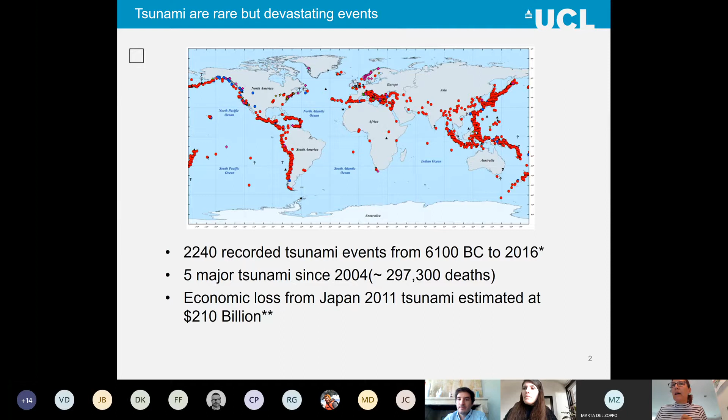The work presented today is part of research I've been conducting for the last 13 years with a number of partners. I thought I would list these here to show that this is not just one or two people's work, but the work that Marta and Marco are presenting, all led up to by significant collaboration with many partners across UCL, as well as outside of UCL, such as HR Wallingford.

Let's start our journey through tsunami engineering with the first question: what does a tsunami look like? For those who don't know, a tsunami is essentially a large wave with particular characteristics. When offshore in deep ocean, it typically has quite a small amplitude, but when it comes near shore, the amplitude grows and can devastate, causing a lot of damage.

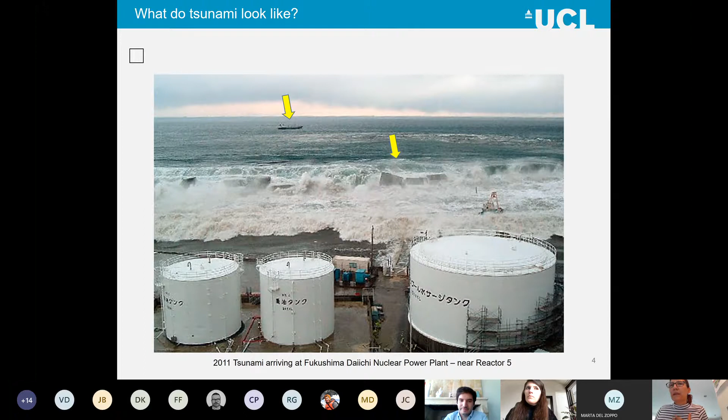This is a picture from the Fukushima Daiichi nuclear plant in Japan being hit by the 2011 tsunami, showing the seawall being damaged. But a particular feature of tsunami compared to other waves is their wavelength - they are extremely long, and this is important from the point of view of inundation properties as well as their forces on structures. So we're focusing on the structural engineering part of tsunami today.

But the characteristics of the tsunami have an important influence on the loading that the structure feels. This is showing you a picture of the Boxing Day tsunami as measured by an echo sounder offshore of Thailand, and it shows that the wave period is about 23 minutes offshore. This long wavelength results in a very long duration inundation onshore.

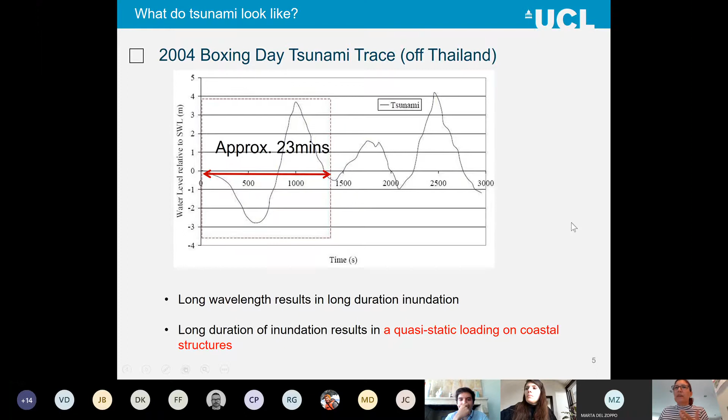So we're talking flows that last a matter of minutes, not seconds. This long duration inundation results in what we now know is a quasi-static loading on coastal structures. It's worth remembering that because many of you are earthquake engineers and we're not used to thinking about static loads so much as dynamic loads.

I think quite a revelation to myself was actually that in the case of tsunami, buildings' dynamic properties are actually not excited. Within this image, what I'm trying to show you is a set of curves for a single degree of freedom system, or a series of single degree of freedom systems with different ductility levels shown in different colors. It's basically looking at what overstrength these elastoplastic single degree of freedom systems can achieve when affected by loading that lasts T duration compared to their period.

Looking at the curves can be quite difficult to interpret, so I'm going to give you an example of what this means in practical terms. If we think of a 10-story building which has maybe a natural period of around 1 second, and let's say it has a ductility of 4, if you look on the curve, essentially its overstrength will be about 0 for any load that exceeds a duration of 3.5 seconds. It's not exactly just the load duration, but a load greater than its yield strength.

So as a tsunami load can exceed 20 minutes, the ductility plays a very little role. In earthquake engineering, we use ductility to resist, for very short period loading, higher loads than the yield strength of the structure, or higher loads than actually the maximum capacity of the structure. We take that through deformation, and that deformation is then recoverable typically after an event.

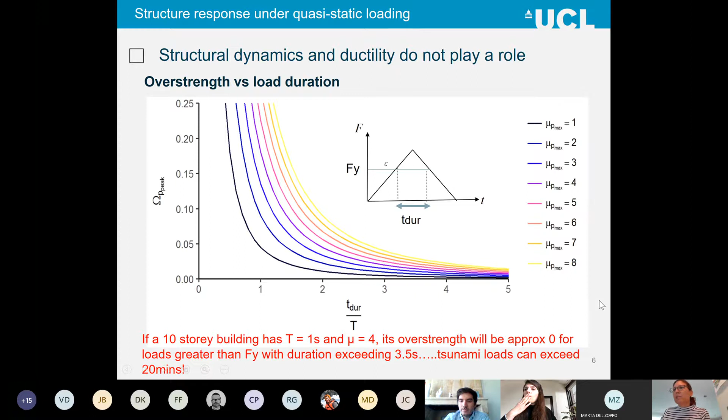In the case of a tsunami, no — your structure yields, and then the loading keeps pushing it, so it keeps deforming the structure until the structure collapses. This is a major difference between the two types of loading, and I think it's a difference that has been largely overlooked because tsunami engineering has been led by earthquake engineers.

So what are the other differences between earthquake loading and tsunami loading? Well, quite simply, the distribution of loads. If we think about a nonlinear static approach often used in earthquake engineering, you apply the loads in an inverted triangle, as shown here. In the case of tsunami, the loads come from below — the water inundates the ground story, first story, second story in sequence, and the loading is applied from below in a triangular approach.

Now, if we push over the structures using these two different loading distributions, we actually see very different strength capacity of the structures. Under earthquake loading, the seismic strength is actually much smaller than the tsunami strength, and this is quite interesting — there is no direct relationship between the earthquake capacity of a structure and the tsunami capacity of a structure.

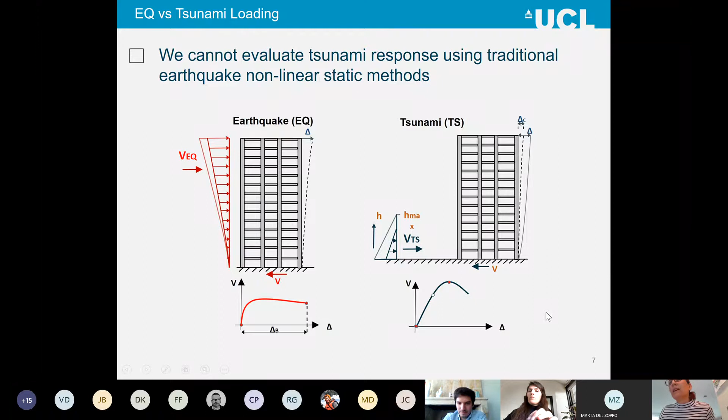This is something that Marco will come to again within his presentation. So the two main differences between earthquake responsive structures and tsunami responsive structures are given by the nature of the loading — the fact that it comes from below, and the fact that it's long duration, and therefore that ductility essentially plays no role. So a tsunami response is dominated purely by the strength of the building, with no contribution of ductility.

Tsunami loading also, because it comes from below, applies massive shear forces, lateral shear forces on the elements, particularly at the ground story — again, something you will see in both Marco and Marta's presentations. But because it's long duration loading, nonlinear static methods can actually represent the tsunami response of a structure well, much better than they can in an earthquake situation, because earthquake loading is actually very strongly dynamic, whereas in an earthquake we simulate, we assume it's static when applying pushover methods, but actually it's not.

In the case of tsunami, nonlinear static methods can represent tsunami response properly, but we cannot use the same methods that we use in earthquake engineering. So new tools need to be developed, and some of these are going to be explained by Marco.

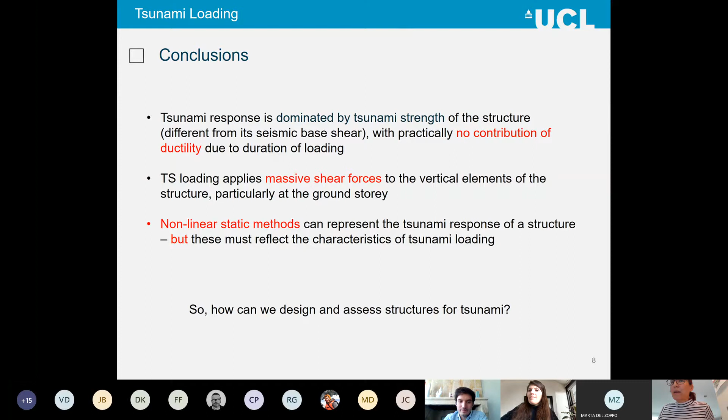So in the next two presentations, what you're going to see is essentially a summary of some of the advances in both design and assessment of structures for tsunami, carried out by our research group and collaboration. I hope you will enjoy. I will pass over to Marco first, and thank you all for listening to my short introduction.

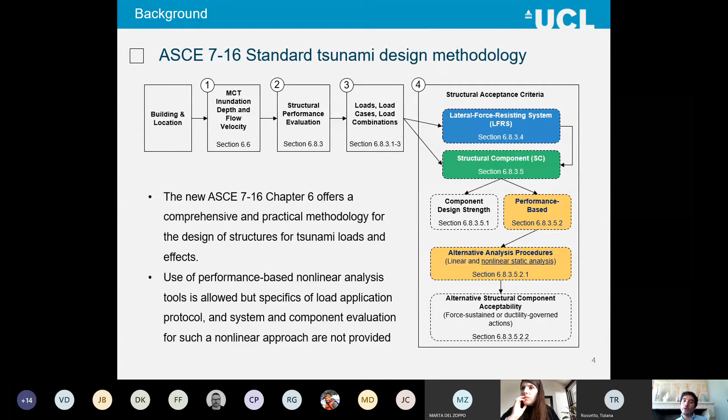So the question for most of you might be, how do we perform a tsunami pushover analysis? As Tiziana mentioned earlier, we can start from the seismic pushover analysis, which has been a typical approach in past research studies. Essentially it's called constant depth pushover: you apply fixed loads at fixed locations along the height of the structure and push that structure up to failure, assuming a constant depth.

But as you may expect, this is not very realistic, because a tsunami is an inundation - there is an increase and decrease of the tsunami depth and flow velocity over the duration of the event. That led to the development a few years ago at UCL of the variable depth pushover, which was found to capture better the effects of the tsunami on the structure.

In these analyses, both the tsunami depth and the flow velocity are increased following a load control approach. That is, however, a limitation, because it cannot capture the degrading branch of the pushover curve.

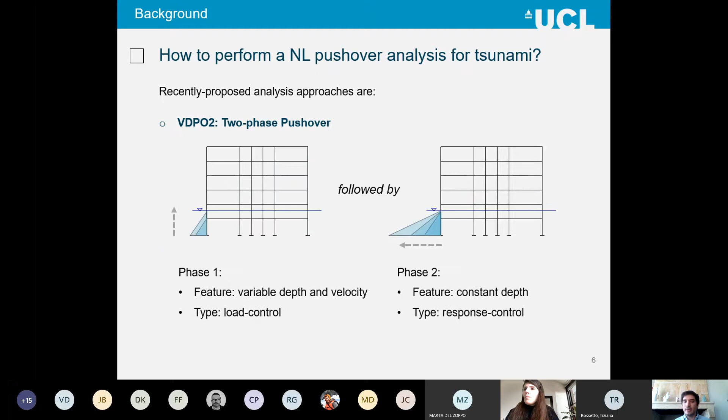So more recently, we came up with an approach that is the VDPO2. It's essentially a two-phase pushover that combines the advantages of both methods. In the first phase, we apply an increasing load in depth and flow velocity up to the point where we want to stop the analysis, because we have reached a prescribed load or because there is a numerical convergence issue. At that point, the analysis switches to a second phase.

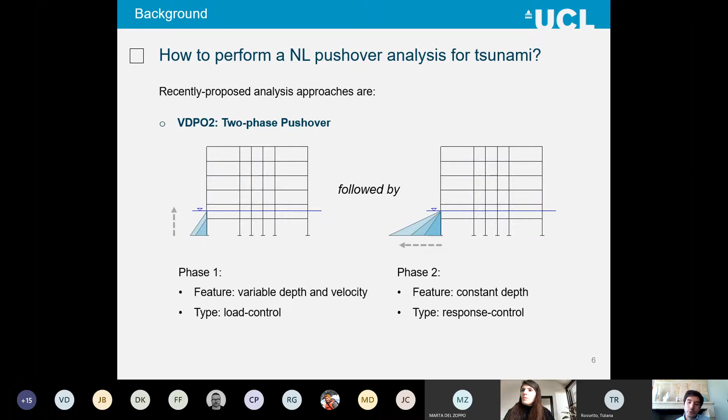Now the presentation today will show you how we try to adapt this methodology within the design framework of the ASCE 7-16 to provide a tool that users and practitioners may follow when they have to design a structure to tsunami loading.

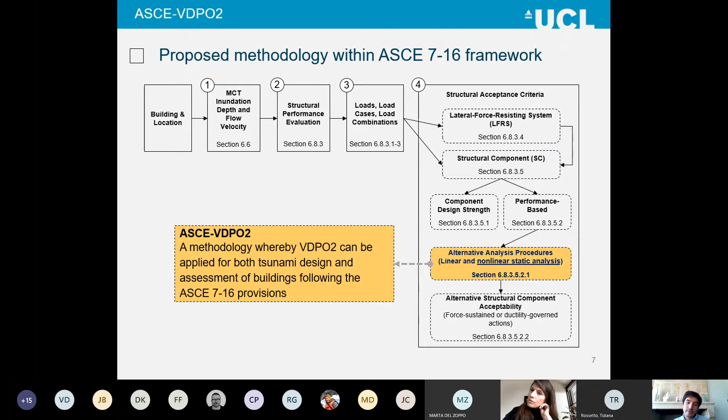To demonstrate this approach, I will be using a case study building: a 6-story reinforced concrete building located in a highly exposed area to tsunami in Seaside, Oregon. This area is also adjacent to the Cascadia subduction zone, so seismic and tsunami hazards are both very high.

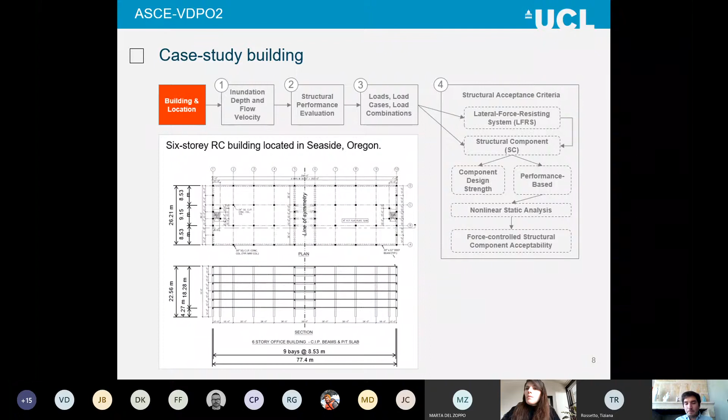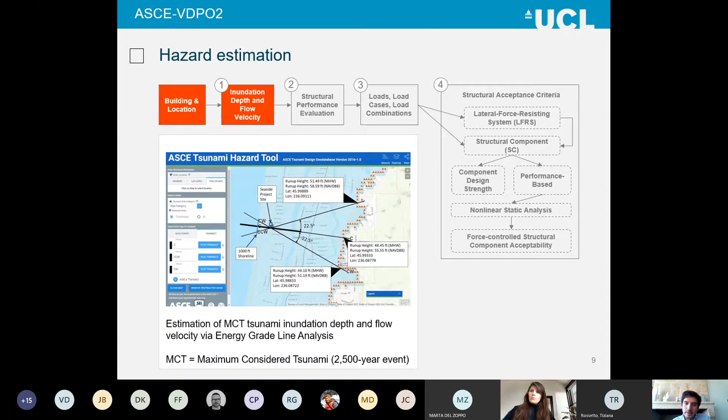The code also provides a time history curve for the tsunami. This means how the flow depth and flow velocity are assumed to vary during the event, and that identifies some load cases that are part of the design process.

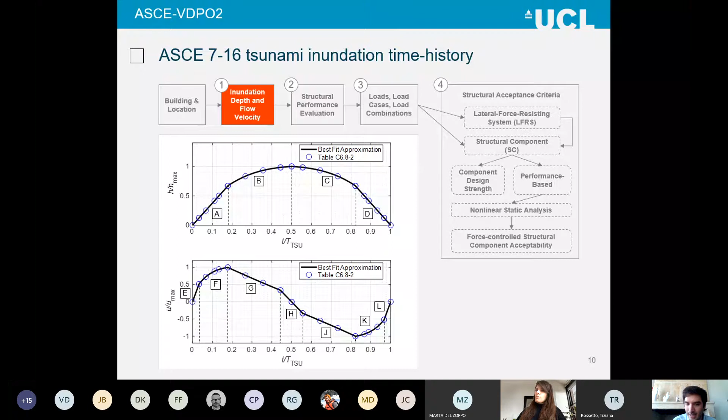What's important to remember is that these are the two main parameters that characterize the hazard at the building site. One can estimate relatively easily the total force applied to the structure, the overall force that will be resisted by the lateral force resisting system.

It's interesting to note that the maximum force occurs when the flow velocity reaches its peak, and the flow depth is two-thirds of the maximum value. This stage is identified in the code as load case 2. So this is the background in terms of design.

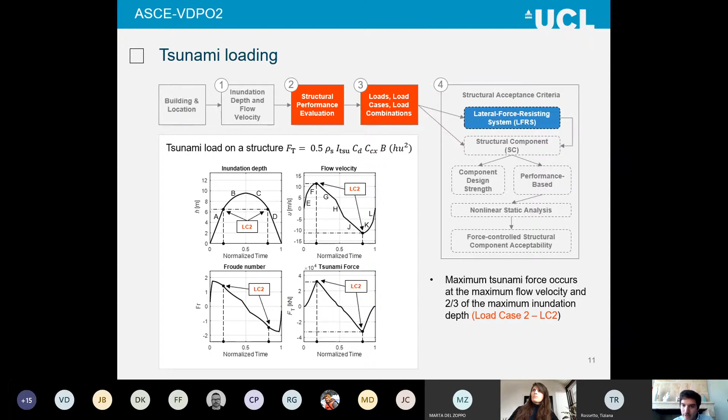So how do we apply all this into our pushover analysis? It's clear that load case 2 is controlling the design of the structural system. So what we have come up with is to apply directly the time history.

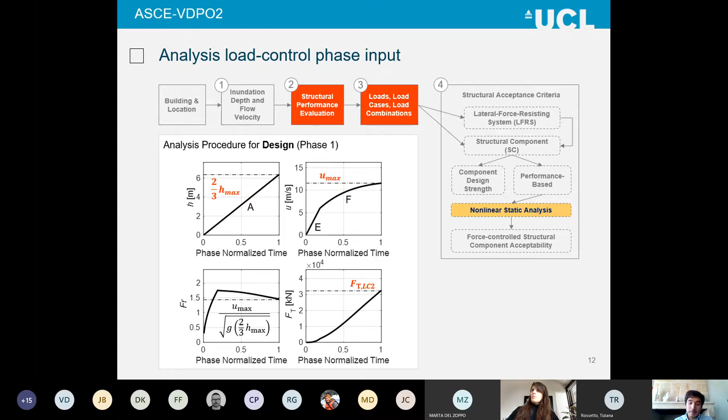We apply the pseudo time history analysis curves provided by the code into the analysis tool, so that we can evaluate the behavior of the structure up to this maximum force. At that point, the analysis can switch to a constant depth pushover to bring the structure to failure. But once we know this force, the question is how do we apply this force to the structure?

The ASCE 7-16 considers the tsunami force as uniformly distributed along the structure, but does not prescribe how this force should be applied along the columns when discretized.

A typical approach in past studies has been similar to what you do in a seismic pushover, applying nodal loads at the story level — these could be named story loading discretization. An alternative approach tested more recently is to apply loads along the columns instead of just at the story level.

So a distribution of point loads along the columns that was found to provide a better estimation of the impact of the tsunami loads on the structure.

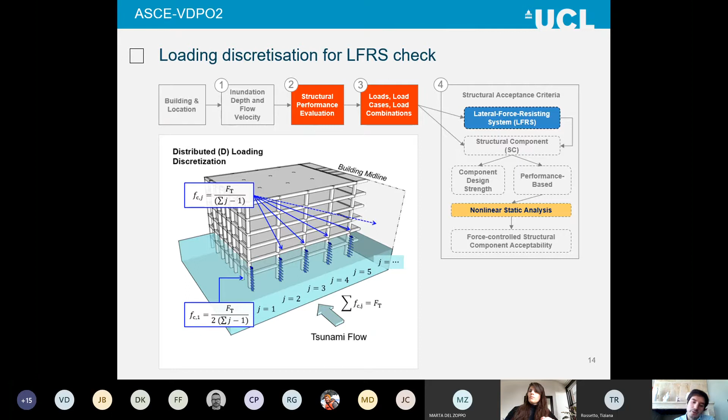An important aspect to understand is that a portion of the loads by which we discretize the overall tsunami force goes directly to the foundation. So what we're actually looking at here is the net tsunami force that is going to be resisted by the lateral force resisting system.

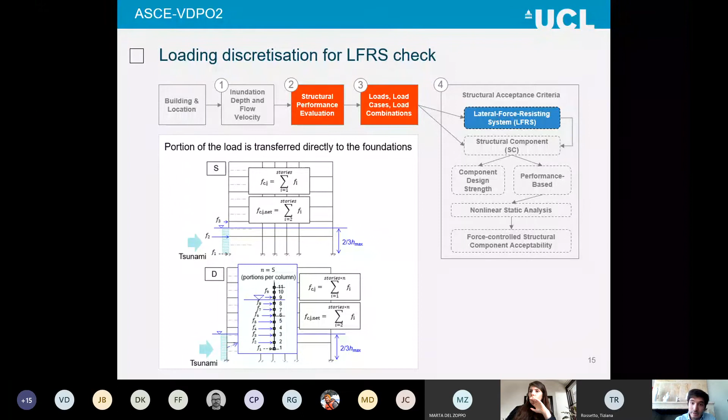At the start of my presentation, I mentioned there are two main checks according to the codes. One is the systemic check on the structural system, but the second one is on the structural components. Individual structural components are subjected to an enhanced tsunami force due to local effects around the elements.

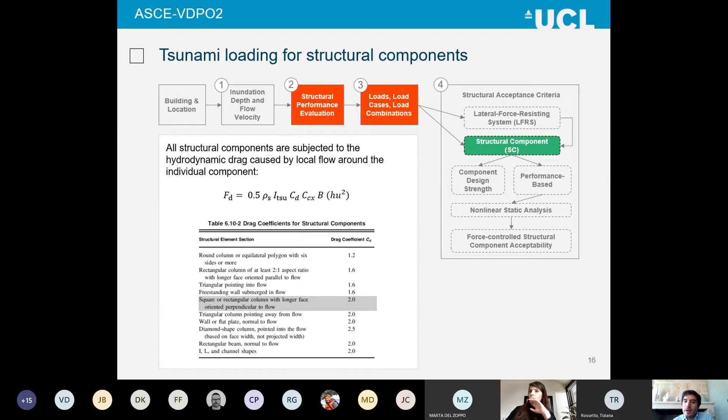Also, if these structural elements are part of the lateral force resisting system, they should be tested against the combined effect of the systemic and structural component loads. That means we need to come up with a discretization that accounts for this second check.

So what we have proposed is to apply a distribution of point loads to the individual line of columns where we want to perform the structural component test check, and to the remaining columns we apply the remainder of the systemic tsunami force.

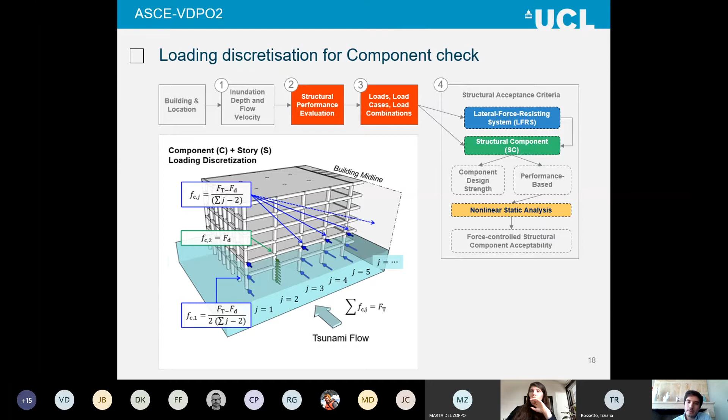These remaining columns can be subjected to either point loads or distributed loads, as in this sketch, or point loads. We have tested all these assumptions and loading discretizations in a finite element model in OpenSees.

So I developed a 2D model of the structure. Due to time restraints, I'm not going to go into the details of this modeling, but I want to highlight two things. First of all...

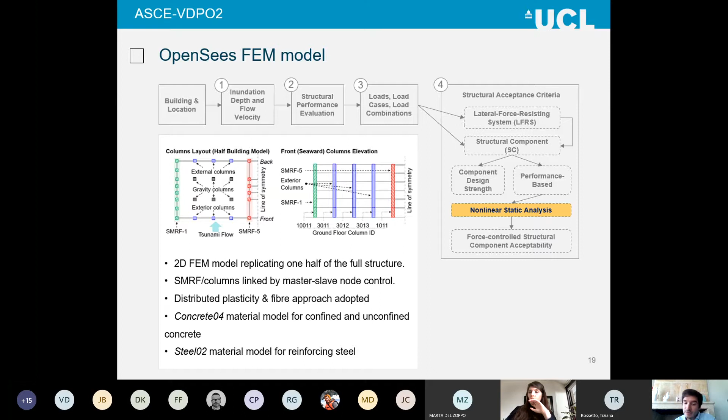A distributed plasticity approach for modeling the structural elements is essential because we are applying a distribution of point loads along the elements. This is something you may not always assume in a seismic pushover analysis.

But also there are shear reinforcement variations along the ground floor and upper story columns, and that can also play a role in the response of the structure to this tsunami loading.

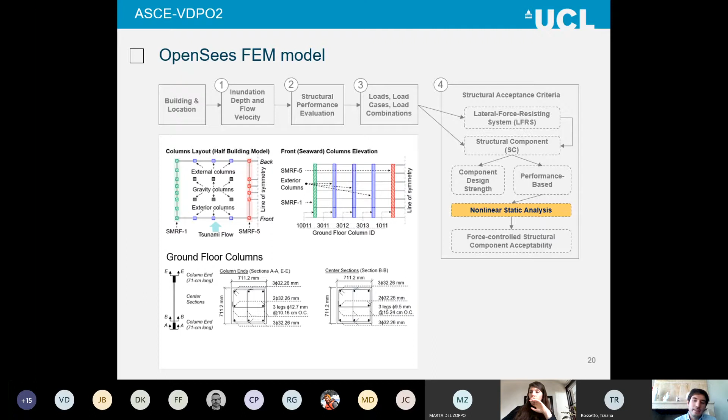Let's now look at the results, and compare what you get by using the prescriptive systemic check — what the ASCE 7 tells you to do — using a simplified approach that essentially compares the applied tsunami force as calculated before with the design strength of the structure, the seismic design strength of the structure, enhanced to account for the typical overstrength.

For this specific case of the building, the applied tsunami force is smaller than the expected seismic strength. What's interesting to note is that this expected seismic strength, as defined by the code, is essentially based on the overstrength factor for the typology of frame — here a reinforced concrete frame — and the design base shear, depending on its location and the gravity weight.

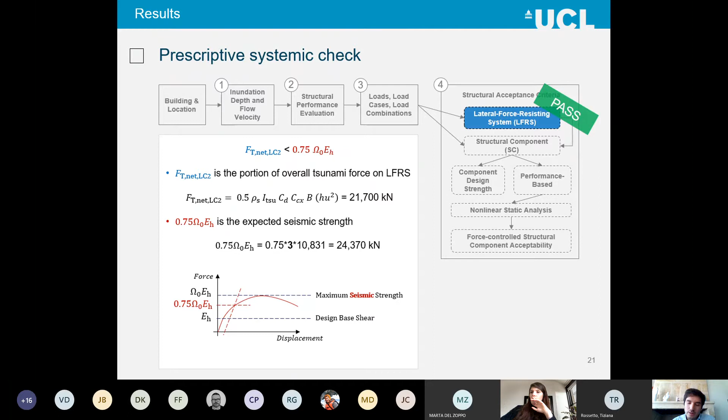But to draw a fair comparison, we also performed a seismic pushover analysis on the building, and we found that the actual strength of the structure is smaller than what was expected by the code. Generally speaking, this would identify an issue with this simplified check, because in this specific case, the simplified check using the actual strength would fail the test.

But more interestingly, as Tiziana mentioned at the start of her introduction, the behavior and response of the structure under tsunami loading is significantly different from the seismic one, because we can see an increased stiffness and increased lateral strength. This is what we've observed in past studies as well, because it reflects the different nature of how seismic and tsunami loads impact the building.

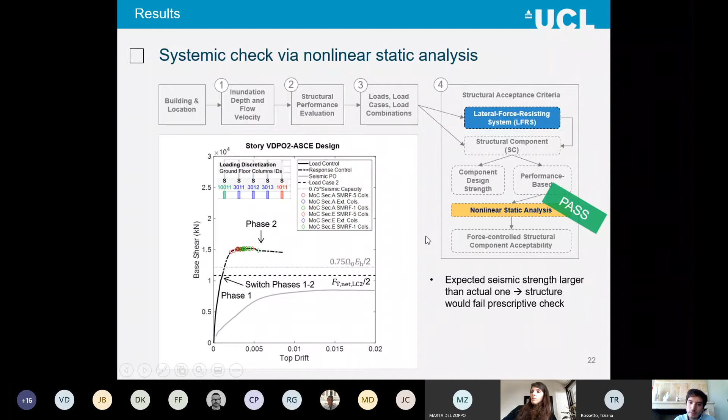When we use the other assumption for the discretization of the overall systemic force, we see a different strength, because the share of forces going into the foundation is much smaller under this assumption.

But since the forces are applied mainly at the ground story columns, these induce large shear forces, and therefore shear failure occurs, shown here as filled markers along the curve. This occurs earlier than the flexural yielding in the columns.

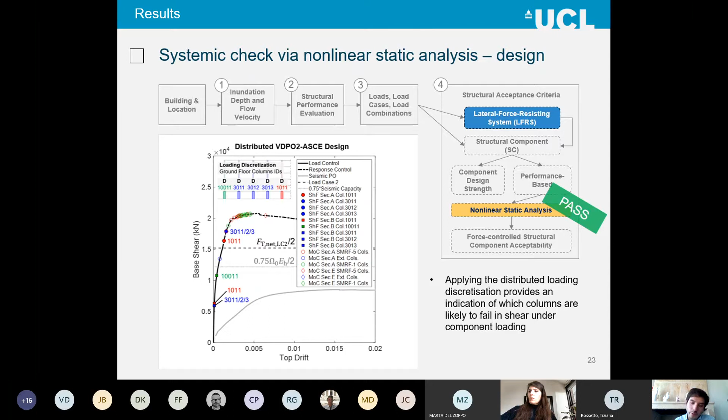This distributed loading discretization can give us an understanding of what's happening when we apply considerably large forces at the columns, but it does not reflect the component loading, because the component loading, as I showed earlier, is an enhanced force on a single individual column.

So that is what we did in the next check. For the structural component, we applied this enhanced loading on a single column and saw what happens. Essentially, the output of this check is that the structure needs to be strengthened, or the ground floor columns need to be strengthened, to meet the collapse prevention performance level.

But you can see the advantage that by using the tsunami pushover analysis, you could identify relatively effectively which elements need to be strengthened. We found similar results using either distributed or story loads for the remaining elements.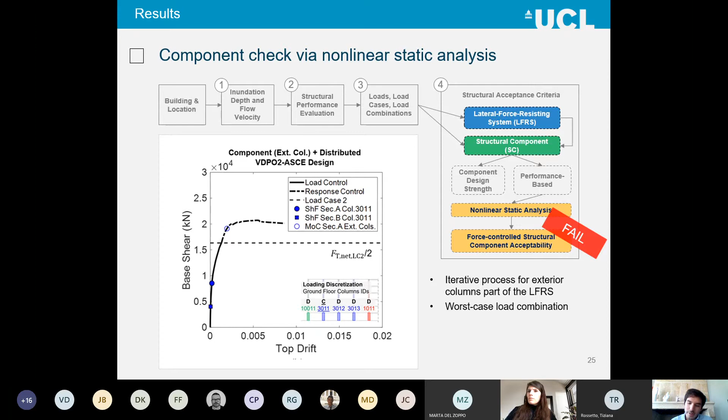To conclude, we can say that this procedure offers a tool to practitioners to apply tsunami pushover analysis in the context of the ASCE 7 standard. There's currently no guidance, so this has been welcomed by the subcommittee, and we're trying to implement this into the commercial software Seismostruct to provide a tool that can be used more easily than in OpenSees.

But there are two main remarks I'd like to make before concluding. It's clear from these results that it's strongly recommended to perform nonlinear structural tsunami analysis instead of the simplified prescriptive check, due to the complexity of relating the seismic and tsunami lateral strength of a structure.

And when we look at the component loading, it's clear that a tsunami pushover analysis can help identify better which critical elements need to be strengthened. This could provide a more economical design instead of redesigning the entire structure to meet the design force specified by codes.

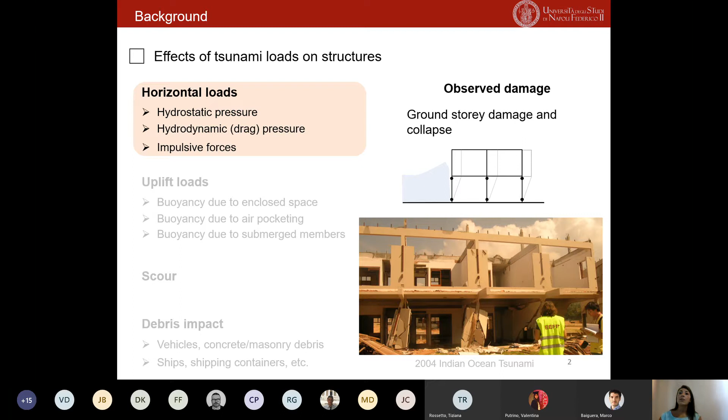As we know, tsunamis are very complex phenomena, so they induce different kinds of pressures and effects on existing structures. We have horizontal loading in the form of hydrodynamic or hydrostatic pressure that impact the exterior surface of the buildings, a function of the exterior envelope of the structure, and can have high magnitude at the bottom of the building. So measured damage is concentrated at the ground story level in the form of flexural damage mechanisms, such as soft story at the ground level, or shear failure of the ground story columns.

But we have other kinds of loads: the vertical induced uplift loads induced by the tsunami on structures, which usually are not included in common analysis when we assess the behavior of the structure, but they play an important role in the overall performance.

If we think of a building with a very small opening ratio, or partitions and exterior enclosures able to sustain the tsunami flooding, in such a case we will have high buoyancy on the building caused by the enclosed air inside the submerged building. This enclosed space will develop uplift forces applied to the foundation of the building. These uplift loads, combined with horizontal loads from hydrostatic or hydrodynamic pressure, can sometimes lead to global overturning of the structure, especially in the case of buildings with shallow foundations.

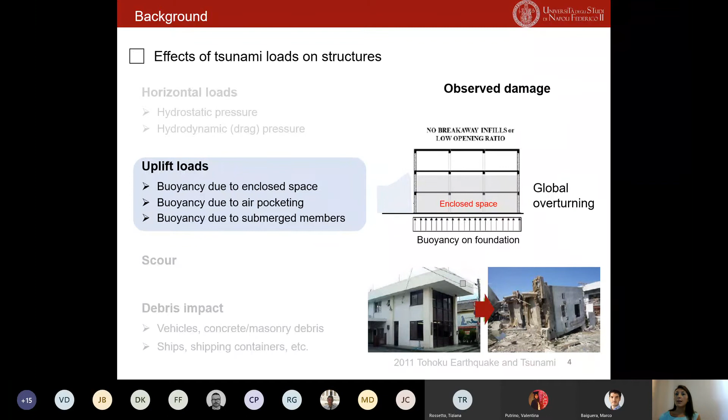But if the structure has exterior claddings not able to sustain the tsunami load, we will have failure of the exterior claddings, or for example windows, if we have very high opening ratios, and the water will pass inside the building. In such a case we still have some enclosed spaces developed below the slabs, for example in the form of air pockets. We will also have reduced weight of the submerged structural members. And if the water level rises over the first story slab, we will still have some enclosed space inside the submerged building that will cause uplift loads.

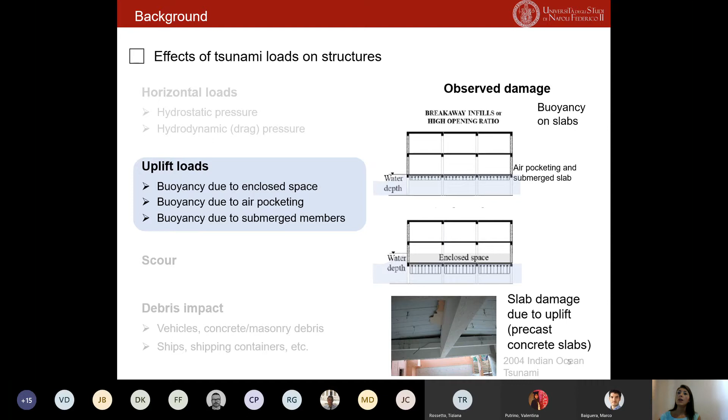In this case, these uplift loads are not acting on the foundation, but on the first story slab of the structure. In some cases, it was observed from past tsunami surveys that these uplift loads can also cause uplift failure of the slab, mainly observed in the case of precast concrete slabs.

Then we have other kinds of effects, such as local scour, the local soil erosion below the foundation, usually at corners of the buildings, and debris impact caused by debris transported by the tsunami flow, which can cause local damage to structural members, and in some cases also partial collapse of the structure.

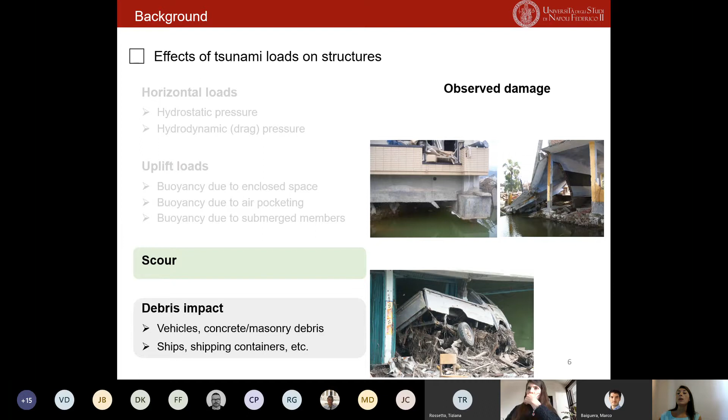Given these different effects that tsunami flow generates on a structure, we can define a general framework for assessing the performance of existing structures under tsunami loads and effects. Given the hazard map, we can define the tsunami parameters at the site of the building, compute the tsunami loading on the structure and foundation, and identify which is the governing failure mechanism for the structure, assessing the capacity accordingly.

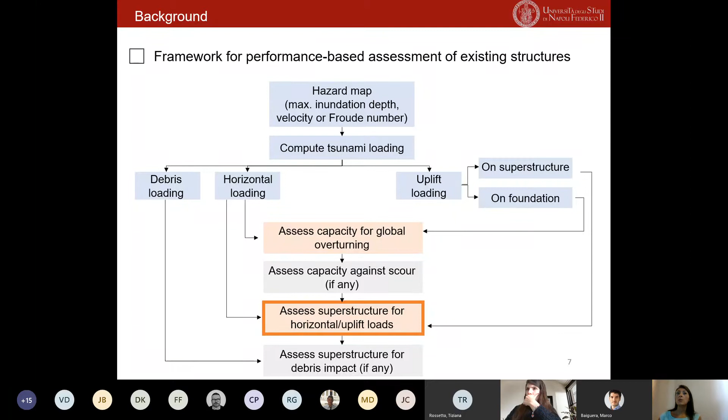So the methodology I'm going to present today is for the assessment of the superstructure behavior subjected to horizontal and uplift loads, under the assumption that this is the governing failure mechanism, and that global overturning and scour are not going to happen to this kind of structure.

In detail, this methodology has been developed to estimate the vulnerability of existing buildings in the Mediterranean region, in particular in Italian coastal communities. In our coast, usually existing structures are in the form of masonry buildings or reinforced concrete frame structures with unconfined masonry infill walls. I will focus on this kind of structural typology.

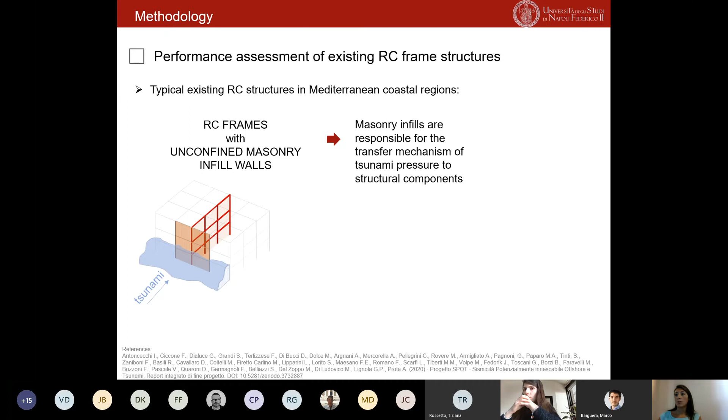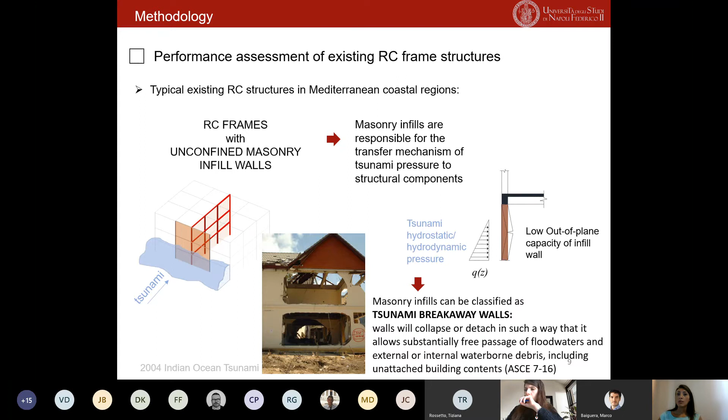So if we think of a reinforced concrete frame hit by a tsunami flow, the water pressure will act on the unconfined masonry walls that are responsible for transferring this load to the structural members. But of course, unconfined masonry infills are characterized by a very low out-of-plane capacity, and they will probably fail under the hydrostatic and hydrodynamic pressure induced by the tsunami flow. So this kind of exterior cladding can be classified according to ASCE 7 as tsunami breakaway walls, walls that will fail under the tsunami loading and allow the free passage of water and waterborne debris inside the structure.

We developed a procedure to incorporate the failure of these breakaway walls and also all the loads related to the water passing through the building, in the form of uplift loads acting on the interior slabs, within the general framework of the VDPO analysis that Marco has already presented. This methodology, which we call VDPO-BI, for VDPO for breakaway infilled frame, is still an incremental analysis, and so for increasing inundation depth, it simulates the actual distribution of loads on structural and non-structural components, accounting for the failure of the exterior claddings.

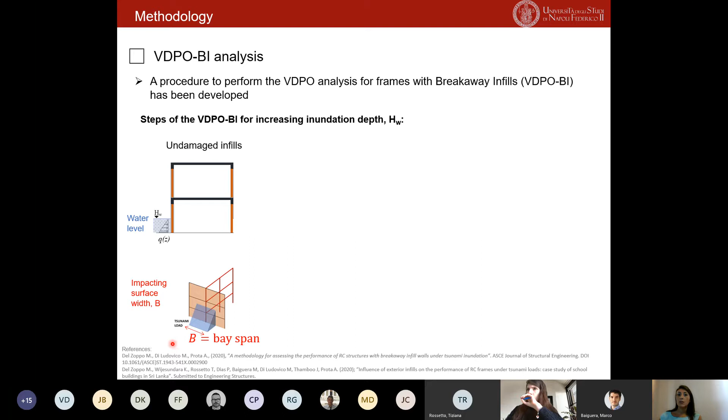So let's see some steps of the analysis. At the beginning, before the failure of the exterior claddings, the building is watertight, so the water is retained outside the structure, and the load acts only on exterior structural elements. The horizontal lateral pressure is computed considering an impacting surface width equal to the entire bay span of the structure.

But when the failure of the ground story breakaway infills is reached, the water is able to pass through the building. So loads are applied to both exterior and interior columns, with a reduced width of impacting surface, considering that the failure of the infills will produce debris inside the structure.

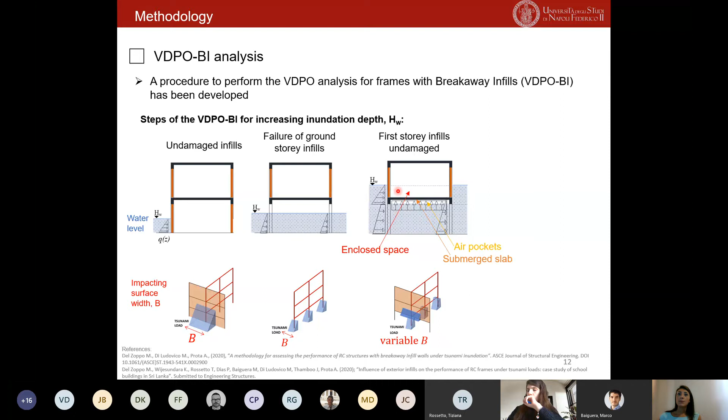When the inundation depth rises over the first story slab, we will have uplift loads acting on the slabs, and this will generate loads that are contrasting the gravity loads still applied to the structure. These are a function especially of the enclosed space inside the building, which increases with increasing inundation depth, until the failure of the infills at the first story is achieved.

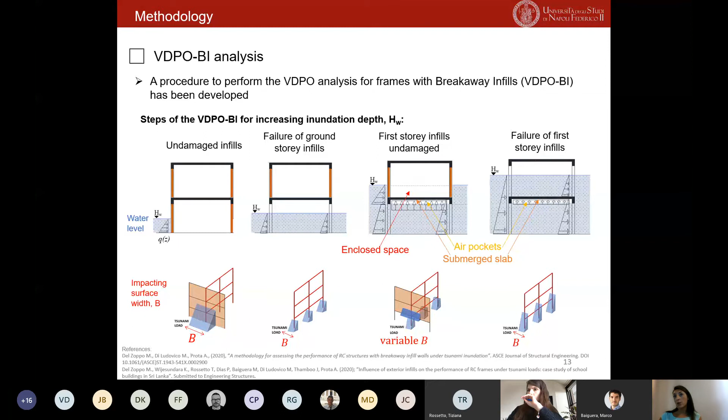This will allow the free passage of water inside the second story, so inside all of the first story. Both the ground story and first story will be completely submerged, and this will change the distribution of horizontal and uplift loads on structural members.

So when we deal with breakaway infilled frames, how can we compute the tributary width for computing and applying horizontal loads on the structural members? Well, minimum values of this tributary width can be adopted, accounting for the effect of damming debris, since the tsunami flow brings with it a lot of waterborne debris that in some cases can accumulate in front of the building, increasing the impacting surface exposed to the tsunami lateral pressure.

Of course, the exact definition of this value depends on the kind of structure we are considering, the connection between the masonry and the structure, and other details of the specific case study.

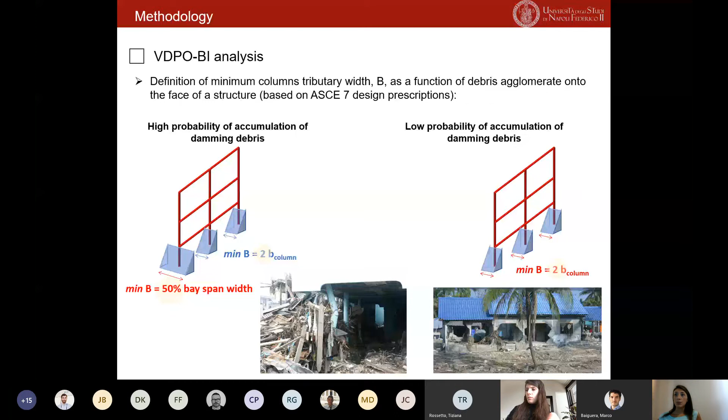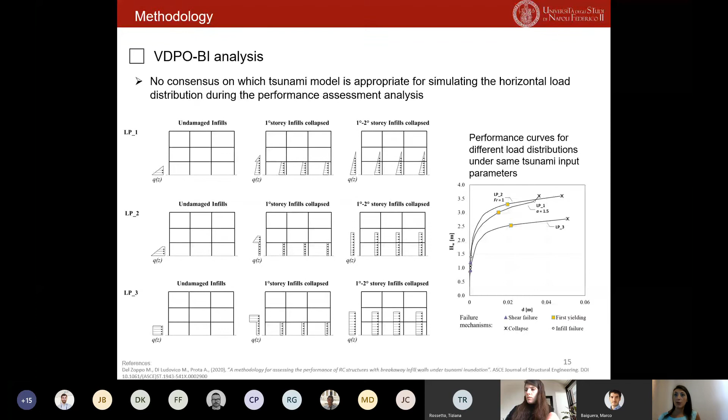The horizontal loads induced by tsunami can be applied to the structure in different distributions, and there is still no consensus about which distribution of horizontal load should be used during the performance assessment analysis. However, the selection of the load distribution is important. It's still an open issue, but it's important because it can affect the overall performance of the structure.

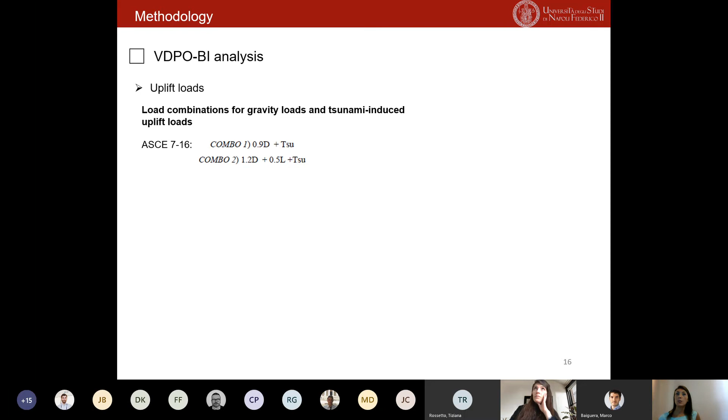Tsunami loads need to be combined with gravity loads, and we can follow the prescription of ASCE 7 for the design of structures. According to ASCE 7, we can use two different load combinations for gravity and tsunami loads. The first is for buildings already evacuated before the tsunami arrives, consisting of 0.9 times dead load with zero live loads. The second combination is less critical, since it considers both dead and live loads. The choice of load combination is important because it affects the influence of uplift loads on overall structural performance.

When the failure of the infills at that story is reached, the water will pass through the building, so this enclosed space component will disappear, giving a release for the structure.

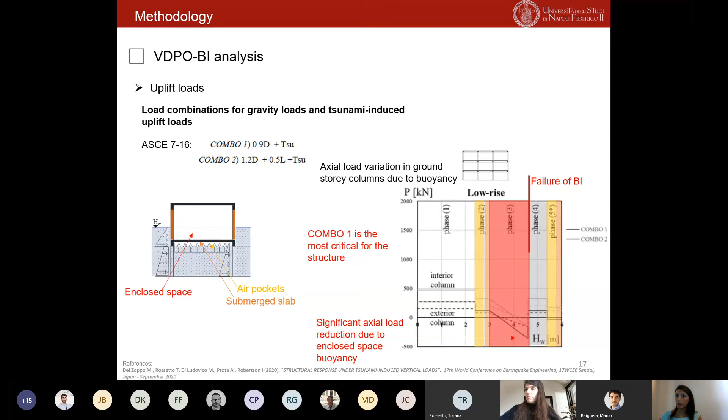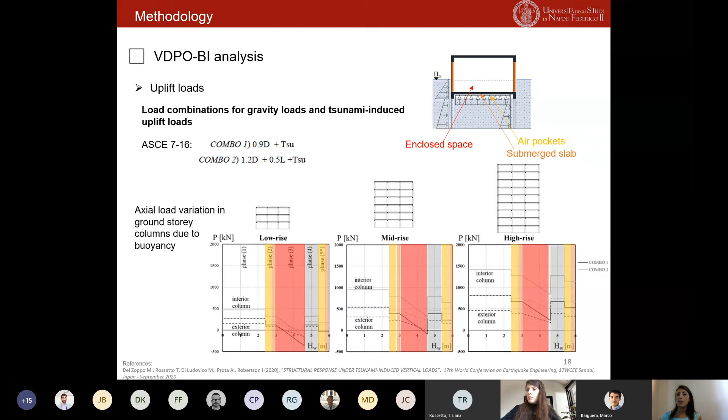Now let's see an application of the methodology. We will apply the VDPO-BI for a 3-story RC frame designed for gravity loads only. For this application I'm considering load combination 1, so the building is evacuated, and I'm assuming negligible damming debris accumulation at the side of the building, so I'm not overloading the exterior column.

Regarding the distribution of horizontal load, I'm using an empirical model developed by Qi et al. in 2014 with a triangular distribution, and a Froude number. The Froude number for the tsunami characterization is assumed equal to 1.

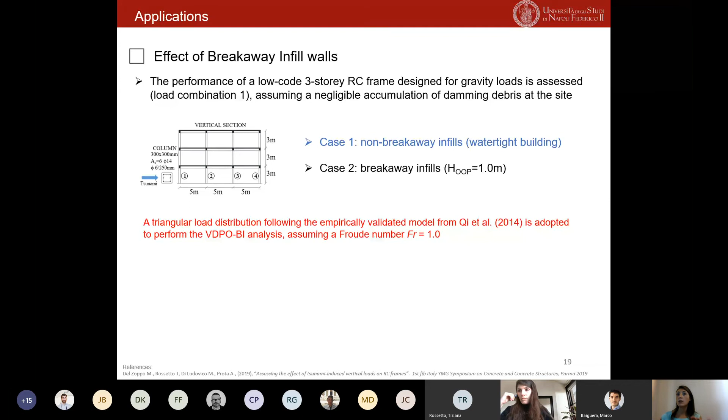The failure of the breakaway infills changes both the global and local behavior of the structure, particularly visible in terms of base shear. Notably, for both combinations, the shear failure of the exterior column, column 1, is still the predominant mechanism. So even considering the failure of the infills, shear failure of the column is activated first, before the first yielding of the columns.

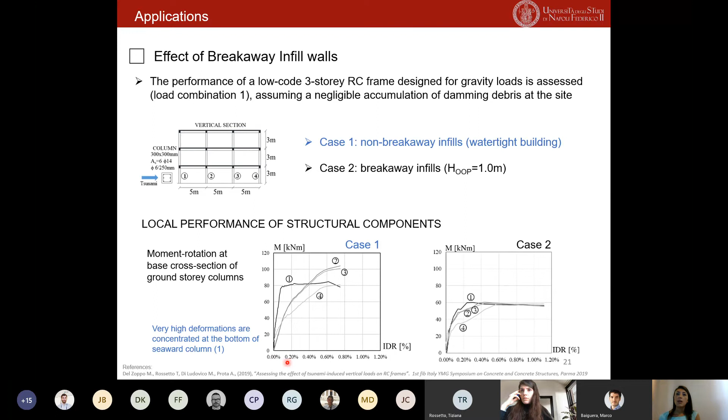Looking more in detail at the local performance of structural components, specifically the moment-rotation relationship at the bottom section of the ground story columns: in the watertight case (case 1), we see high deformation at the bottom of column 1, where all loads are applied in that configuration, while other members remain elastic until a mechanism develops, activating all plastic hinges for the soft story. Conversely, in the breakaway infill case (case 2), all plastic hinges develop almost simultaneously in ground story columns, because the same load is applied to all columns after the failure of the breakaway walls.

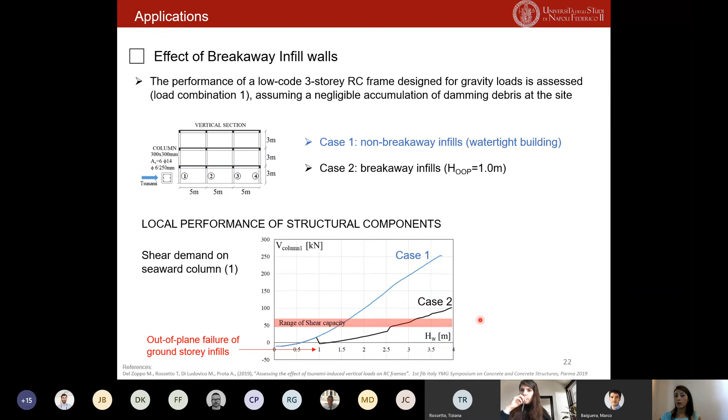So for the specific case, looking at the range of shear capacity as a function of the axial load variation, the failure of the breakaway walls will postpone the shear failure mechanism. Of course, it depends on the capacity of the members of the columns and also on the out-of-plane capacity of the exterior claddings.

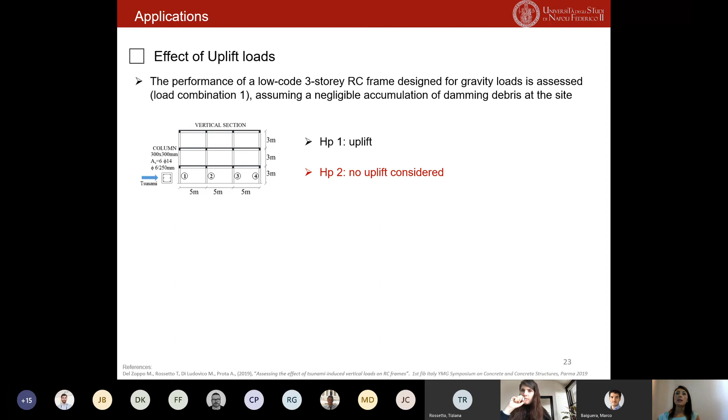And finally, to point out how relevant the uplift loads are on the overall structural performance, the same analysis of the VDPO-BI has been conducted now neglecting the uplift loads.

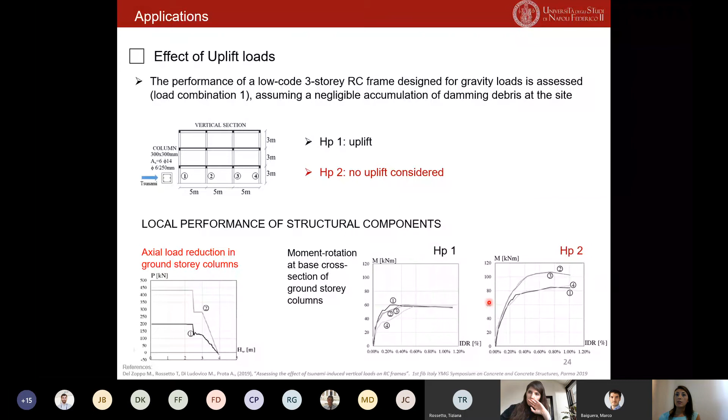So this is the behavior, the moment resisting capacity, in the case when uplift loads are considered, and this one, HP2, is when we are neglecting the effect of uplift load. So there is a very strong difference in terms of moment resisting capacity.

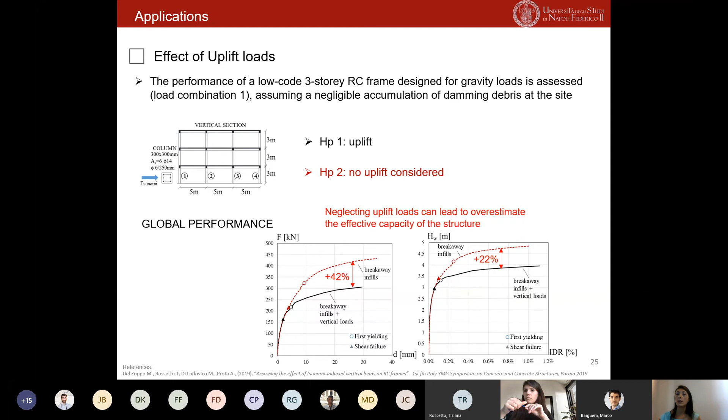And of course, this is reflected in the overall global performance of the structure. In terms of capacity curves, the black line is always the capacity curve considering the uplift loads, and the red line is the capacity curve under the assumption of no uplift loads acting on the structure. It is clear that neglecting this kind of tsunami-induced loads can lead to a strong overestimation of the actual capacity of the structure, both in terms of base shear and also maximum inundation that the building can sustain during a tsunami inundation.

So to conclude, we have seen that we don't have any guideline for the assessment of existing structures. So for assessing the behavior of existing reinforced concrete frames with masonry infills, we developed this variable depth pushover for frames with breakaway infills, the VDPO-BI.

The application of this methodology has shown that the effect of the breakaway infill can strongly affect the global and local performance of the structure. So the use of this kind of approach is recommended when you are dealing with frames, not only reinforced concrete, but in general frames with exterior claddings that can be classified as breakaway walls according to the ASCE 7.

And we have also seen how much the uplift loads induced by tsunami are affecting the overall and global performance of the structure, and also the achievement of local mechanisms such as shear failure. So neglecting this kind of component in both design and assessment can be really dangerous. This needs to be included in all analysis.

And finally, we have also shown that for this kind of structure, with or without considering the effect of breakaway infill walls, the predominant failure mechanism is governed by the shear failure of ground story columns. Of course, this needs to be further investigated also with experimental validation.

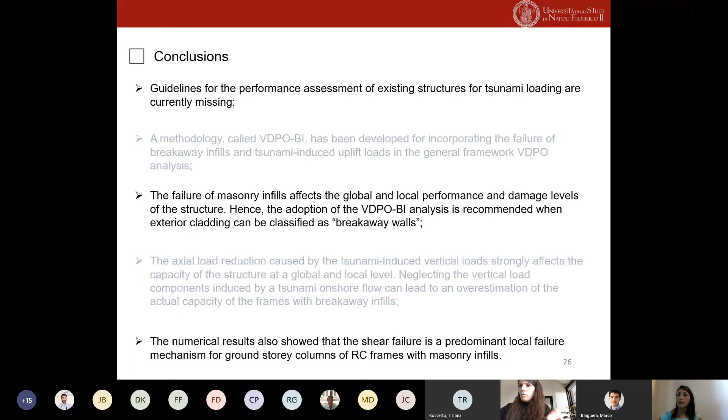Thank you very much. Can you hear me fine? Yes, very well. Okay. I really cannot see the chat box. Me neither. Okay, I think there are a couple of questions.

One question is from Roberto Gentile: Would it make sense to weaken the infills as a retrofit strategy? Tiziana replied, yes, weakening the infills can be effective. Maybe, I don't know if Marta wants to say a little bit more on this.

Yes, definitely weakening the infills can reduce the load acting on the structure. Since we want to preserve the structural integrity and avoid the formation of debris, because the collapse of a structure will also become debris for other structures, in such a case, yes, we can suggest weakening the infill walls. Of course, we are allowing that this building is not used as an evacuation building, and all the contents inside the building can be lost. So in this sense, we can accept this kind of weakening strategy as a strengthening strategy for the structure.